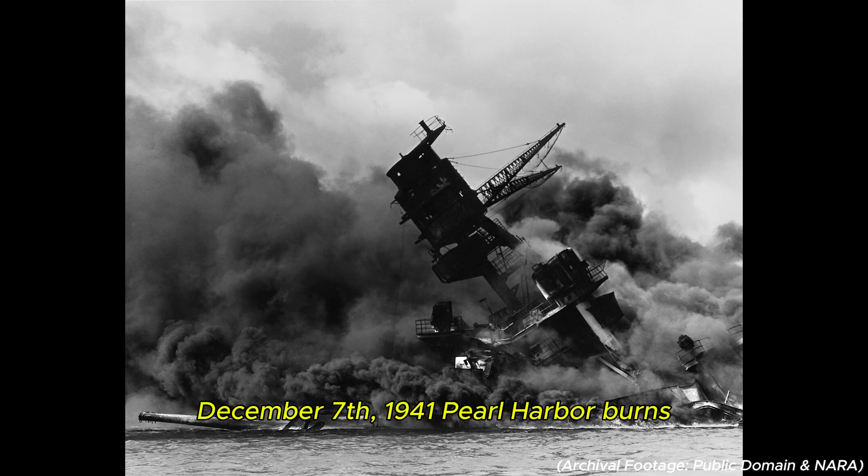December 7th, 1941. Pearl Harbor burns. The illusion of an ocean's worth of safety evaporates in a morning of fire and smoke. But as the last torpedoes find their mark and the battleships settle into the mud, a second silent catastrophe is already unfolding. Within 72 hours, the United States military faces a logistics nightmare.

It has nothing to do with battleships or aircraft carriers. It is a crisis more fundamental, a crisis of shelter. Across the Pacific theater, from the jungles of the Philippines to the desolate shores of Wake Island, American forces are sleeping in canvas tents, the standard issue shelter, and they are disintegrating. Under the relentless assault of tropical downpours, a canvas tent, expected to last for months, is rendered useless in less than 3 weeks.

In Washington, the War Department's morning briefings turn grim. The news from the front isn't about bullets, it's about water. Field reports arrive describing entire supply depots flooded, ammunition, carefully shipped 8,000 miles, ruined, radios, vital for communication, corroded into silence. Worse, they read reports of soldiers hospitalized with pneumonia because their shelter, their only refuge from the monsoons, literally fell apart while they slept.

The very environment is defeating the army before the enemy even gets a chance. This is the first brutal lesson of the Pacific War. You cannot fight a global conflict if you cannot keep your soldiers dry. The obvious solution is the traditional one, wooden barracks, build solid structures. But the Pacific is not Pennsylvania. Traditional wooden barracks require 2 things the military does not have: skilled carpenters and time. They require lumber, which simply does not exist on remote coral atolls. To ship wood is to sacrifice space that could be used for bullets or food.

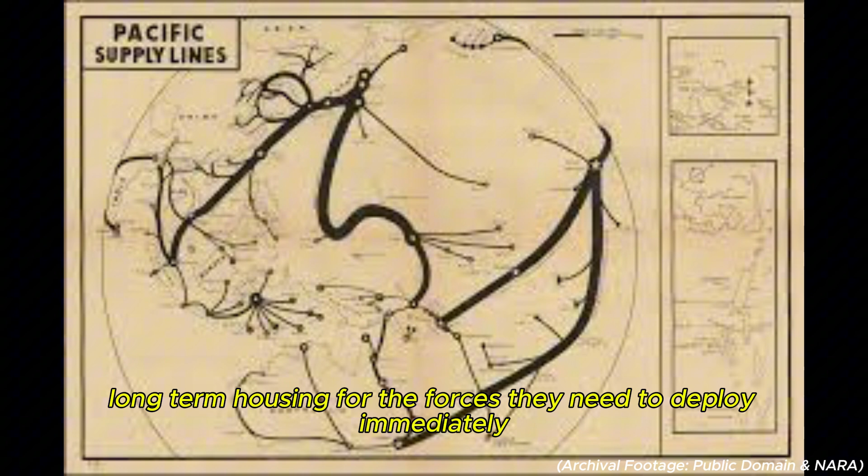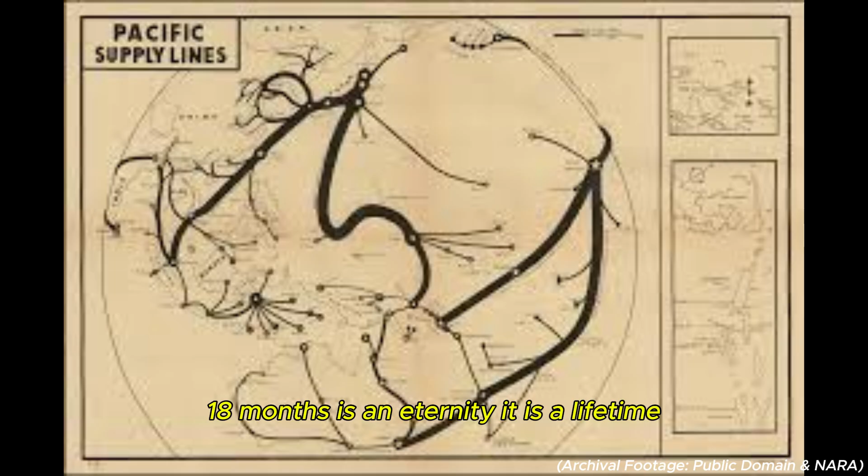The Navy's calculations are horrifying. To build conventional, long-term housing for the forces they need to deploy immediately, it would take 18 months. 18 months. In the chaos of early 1942, 18 months is an eternity. It is a lifetime. It is a guaranteed defeat. Before Brigadier General Eugene Reybold, the Army's chief of engineers, lies a problem not of strategy, but of physics. His engineers present him with what they call the impossible equation.

The equation is simple. The military needs shelter. They need it for 50,000 men yesterday, and they will eventually need it for a staggering 2 million personnel scattered across hundreds of islands, bases, and continents. The requirements sound like science fiction. The structure must be manufactured in a factory in Pennsylvania, then transported 10,000 miles through submarine-infested waters.

It must be lightweight, less than a Jeep, and the components must pack so efficiently they can fit onto a single railroad car. It must be assembled not by skilled carpenters, but by exhausted Marines, men who have perhaps never held a wrench, and they must be able to do it in a single day. Crucially, it must require no foundation, no concrete to pour, no complex site preparation. And then it must survive.

It must survive 130-degree equatorial heat. It must survive Category 5 typhoons. It must survive monsoons that dump 15 inches of rain in 6 hours. And it must survive the very real possibility of Japanese bombing runs. Oh, and it must cost less than $1,000, and they need 10,000 of them ready to ship in 6 months. The impossible equation. Every existing solution is thrown at it. Every single one fails. Let's look at the options on the table in 1942.

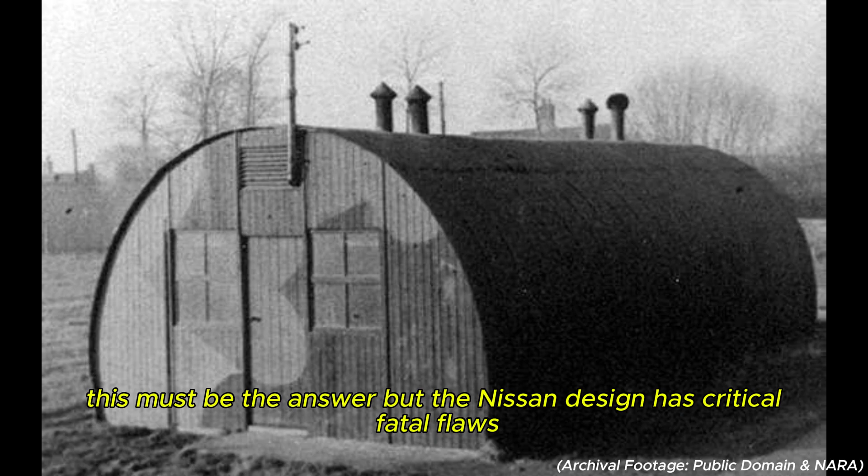But the Nissen design has critical, fatal flaws for a Pacific deployment. The Navy's engineers analyze the British blueprints and find 3 problems that doom the design. First, weight.

The British version is heavy. Its panels require specialized lifting equipment to position. This is fine in a prepared European base, but impossible on a hostile beachhead. It fails the assembly test.

Second, ventilation. The system is designed for the dry Libyan desert. In the 98-degree, 99% humidity of the Philippines, those same ventilation shafts turn the interior into a steel steam cooker, a sauna, unfit for human habitation.

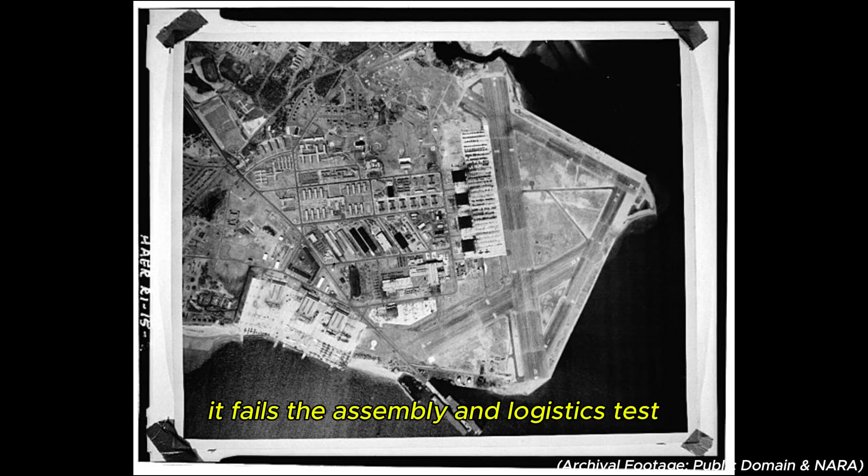And most damaging, the Nissen Hut still requires custom foundation work. It needs concrete pads or carefully built wooden platforms to sit on, which brings you right back to the carpenter problem. It fails the assembly and logistics test. It is a brilliant solution for the wrong war.

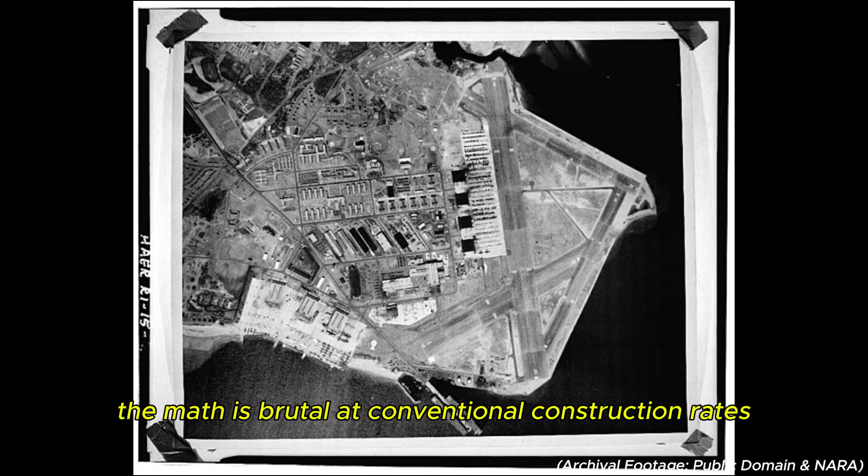The equation remains unsolved. The math is brutal. At conventional construction rates, the war would be over, lost, before half the troops even had roofs.

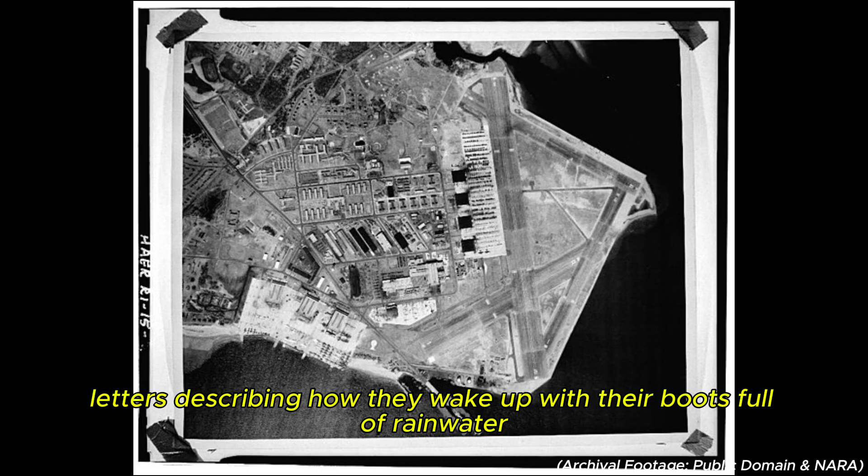Soldiers are already writing letters home, letters describing how they wake up with their boots full of rainwater, how fungus grows on their uniforms overnight, how their temporary tents collapse during storms, sending men scrambling in the mud at 3 a.m.

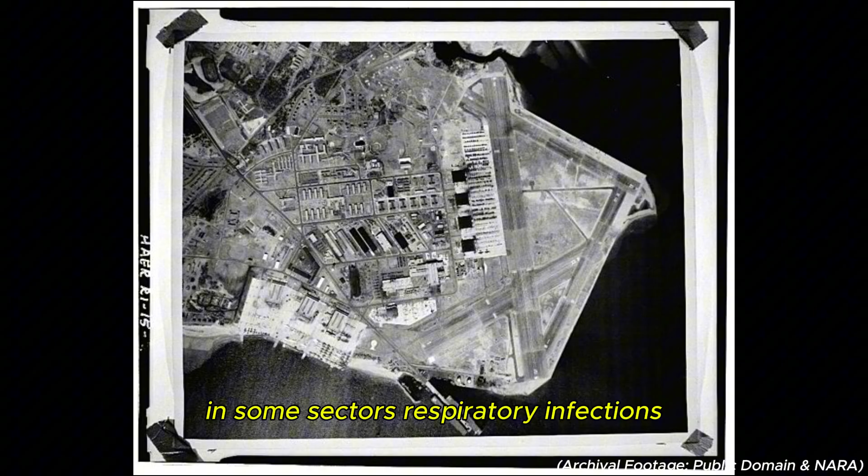The medical corps reports are even more terrifying. In some sectors, respiratory infections, pneumonia, bronchitis, are hospitalizing more men than enemy action. This isn't just about comfort, it's about maintaining a fighting force, a force that doesn't rot away from the inside before it even sees combat.

The call goes out. The specifications, that science fiction list, are sent to American engineering firms, to university research departments, and to the Navy's own fledgling construction battalions. The message is clear. Solve this. Solve it now. It's February 1942. The war is being lost.

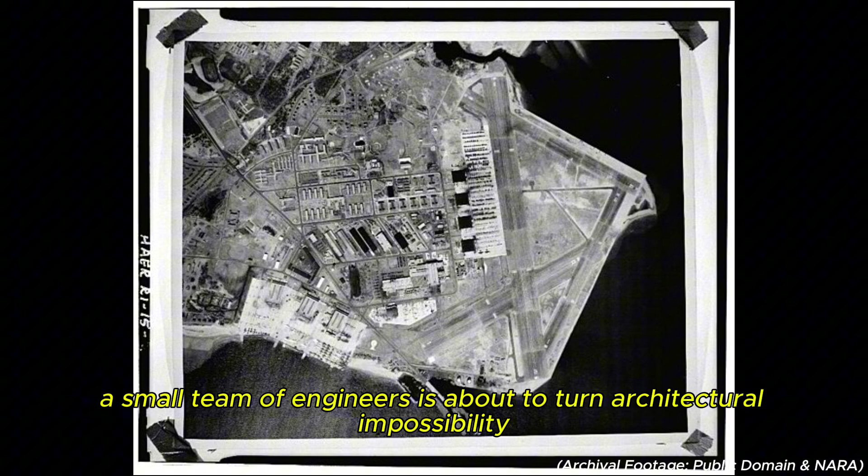The problem seems impossible. And somewhere, in a cold warehouse in Quonset Point, Rhode Island, a small team of engineers is about to turn architectural impossibility into reality.

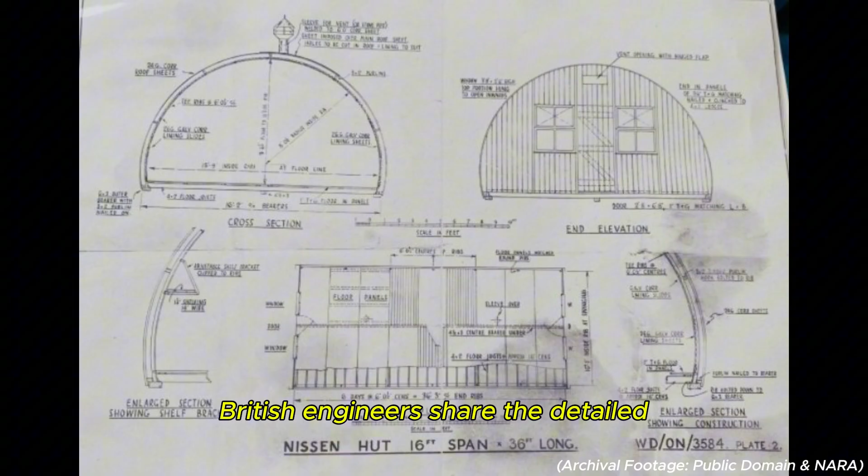February 1942. The crisis is set. The equation is written. In a peculiar twist of wartime cooperation, the first piece of the puzzle arrives at the Navy's Bureau of Yards and Docks. It comes from the British. Grateful for American supply shipments, British engineers share the detailed technical drawings for their best solution, the Nissen Hut.

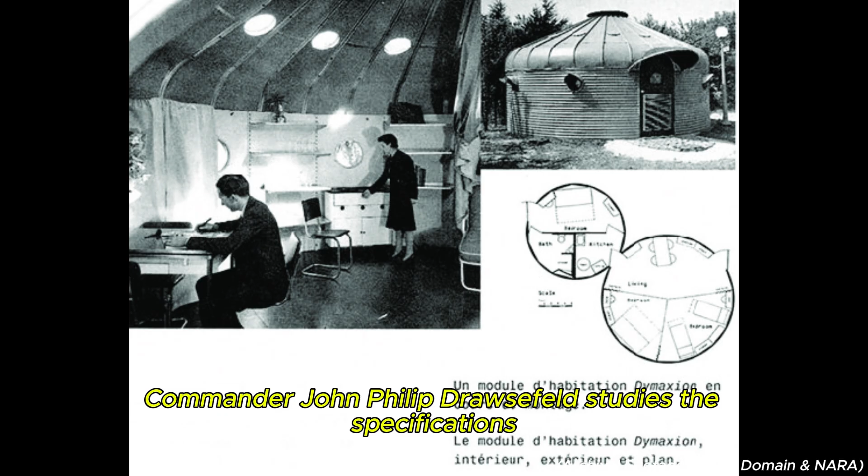On paper, it's the answer. 16-foot wide semicircular tunnels made from corrugated iron sheets bolted to a wooden frame. Commander John Philip Drawsefeld studies the specifications. He immediately sees both its genius and its catastrophic problems.

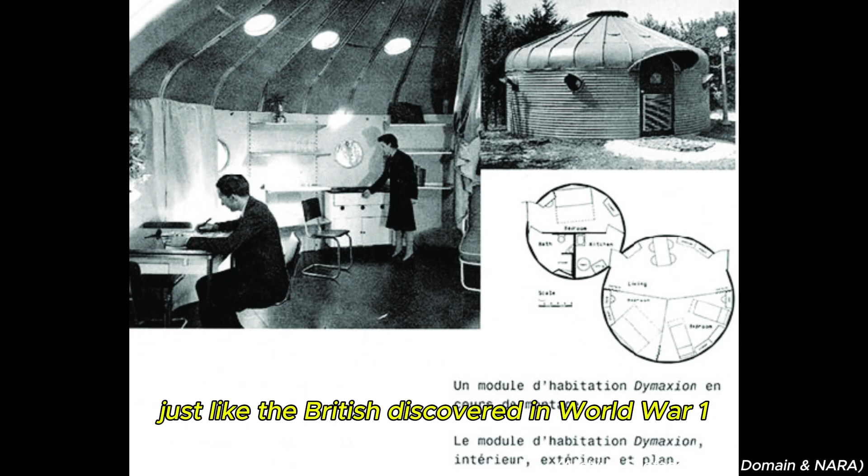The genius, the arch shape. Just like the British discovered in World War I, the arch naturally deflects wind and sheds water without complex engineering. It's strong and simple. But then Drawsefeld's red ink comes out. The problems. A laundry list that would doom the design in the Pacific.

First, the British huts weigh 3 tons when disassembled. They require foundation bolts drilled into concrete. This fails the no foundation and lightweight test.

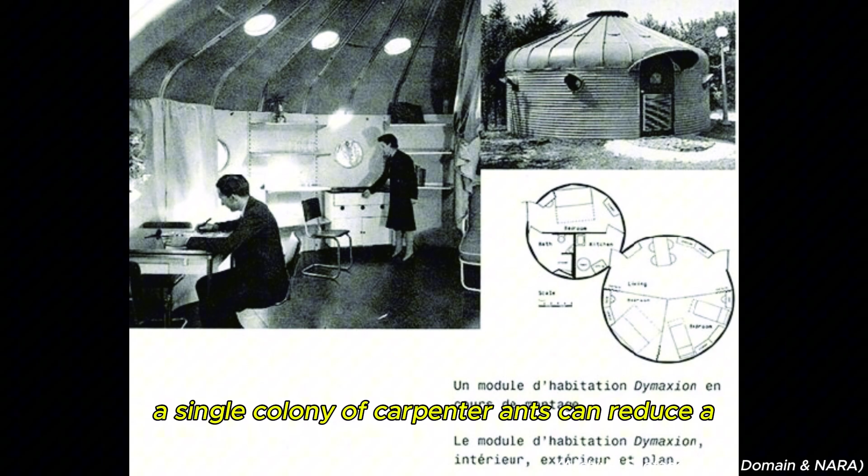Second, the frame. The iron sheets are bolted to an internal wooden frame. Drawsefeld knows what happens to wood in the tropics. It becomes a feast for termites. A single colony of carpenter ants can reduce a support beam to a hollow shell in 1 season.

He circles the ventilation specs. 2 small windows, designed for the cool, damp weather of Scotland, would turn these steel tunnels into ovens at Guadalcanal's 98-degree average temperature. It was a pressure cooker, not a shelter. The Nissen Hut wasn't the solution. It was just a better articulation of the problem.

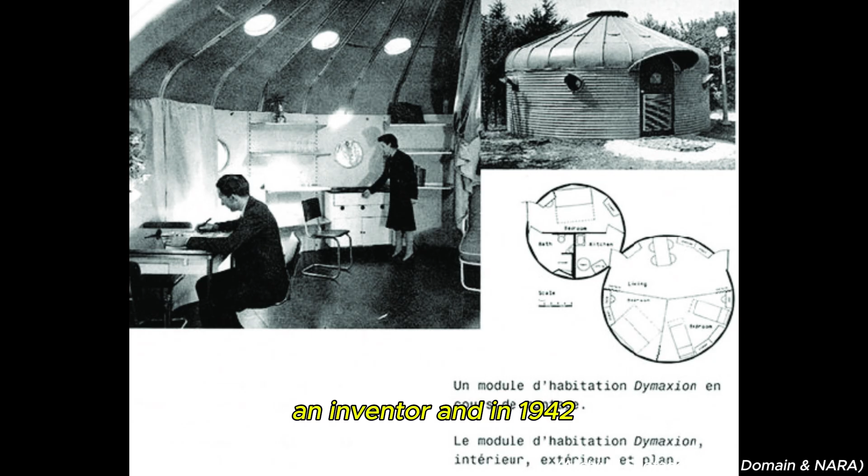But there is another American voice in this conversation, an influence that comes from an unexpected corner. He is an architect, a philosopher, an inventor. And in 1942, most of the world dismisses him as a crank. His name is Buckminster Fuller.

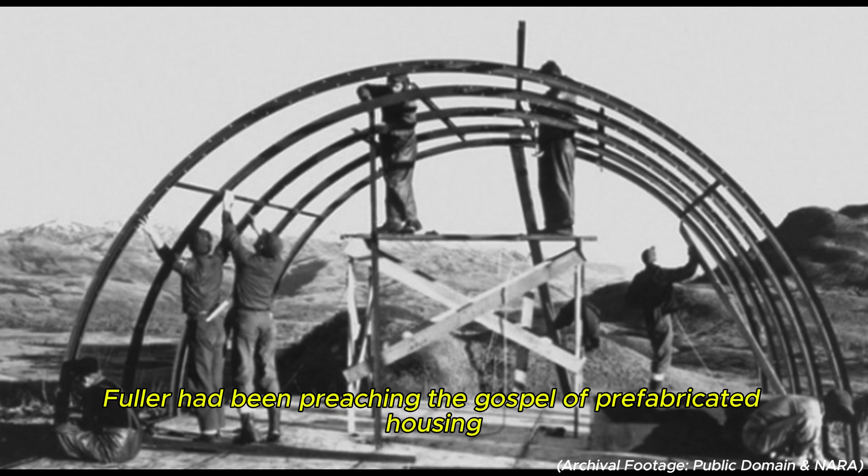Since the 1920s, Fuller had been preaching the gospel of prefabricated housing. His Dymaxion house concept, factory-built, lightweight, assembled on site, made of industrial materials, it reads like prophecy. In 1942, Fuller's ideas about mass-producing housing like automobiles, using steel and aluminum instead of traditional lumber, designing for rapid deployment, suddenly, these ideas sound less crazy.

The military hasn't directly consulted Fuller. They don't need to. His published papers are circulating through every engineering department in the country. And his core insight proves invaluable: treat buildings like manufactured products, not construction projects.

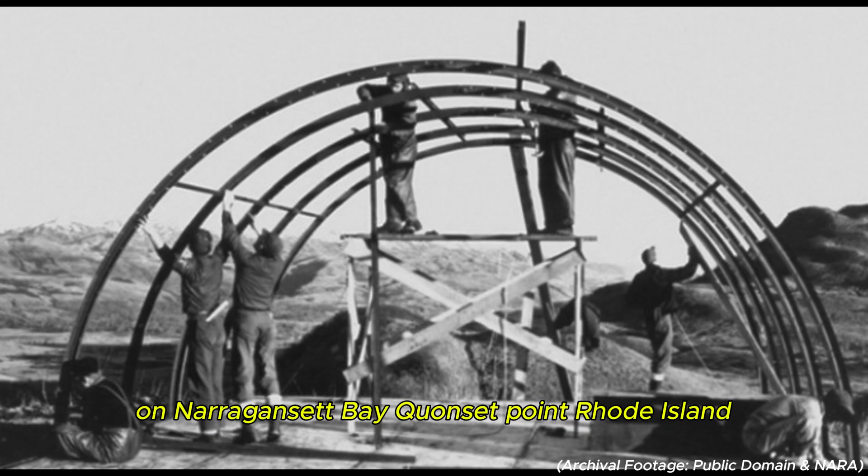The Navy consolidates this new thinking at a freshly commissioned air station on Narragansett Bay, Quonset Point, Rhode Island. The location isn't random. Rhode Island has deep manufacturing expertise in sheet metal, born from its jewelry and silverware industries. It has proximity to the steel mills of Pennsylvania and to shipyards that understand intimately what marine-grade corrosion resistance really means.

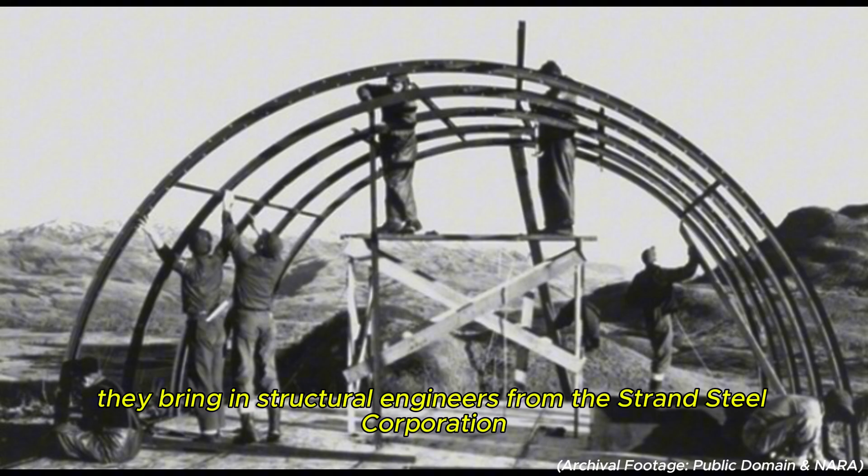In March 1942, the Navy assembles an unusual team. It's not just Navy brass. They bring in structural engineers from the Strand Steel Corporation, men who had spent their lives building prefabricated farm buildings. They bring in architects from the George A. Fuller Construction Company, men who specialize in rapid assembly methods. And crucially, they add Navy officers who have actually served in the Pacific, men who know what typhoon-proof really means versus what it means on paper.

The team lead, Otto Brandenberger, brings that farm building experience from Strand Steel. And it turns out, building a barn for the Midwest is exactly the right experience for this problem. His Strand Steel barns used a simple, elegant trick, self-supporting arched panels. This was Brandenberger's radical proposal.

Look at the Nissen Hut. It's a wooden skeleton with a steel skin draped over it. Brandenberger proposed they eliminate the wooden skeleton entirely. No wood for termites to eat, no complex joinery to fail during storms. He proposed they make the corrugated steel skin itself carry all the loads.

This violates conventional architectural wisdom in 1942. In 1942, steel is for bridges and skyscrapers held together by massive internal frames. It is not supposed to be the building. But Brandenberger knows something they don't. He knows his simple farm barns have survived Midwest tornadoes without any internal framing, and he is willing to bet the same principle can be scaled up for war.

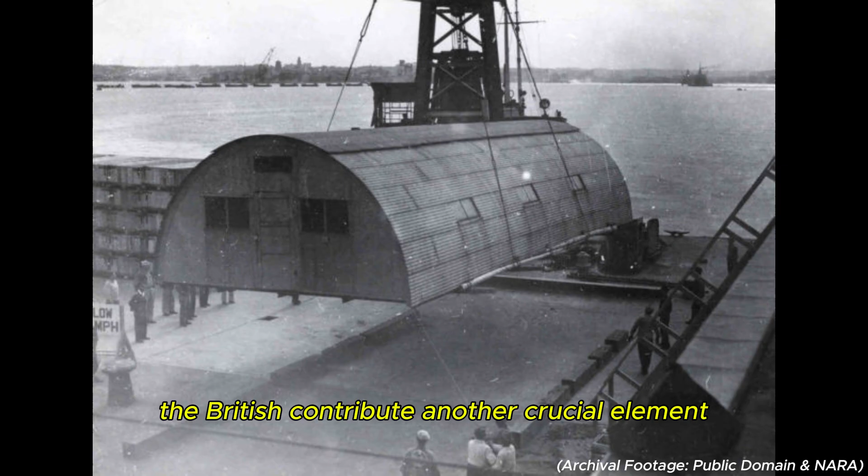The British contribute another crucial element through their painful experience. Their Nissen huts in Burma and Singapore have taught them exactly how tropical environments destroy buildings. The reports read like horror stories. Fungus isn't just cosmetic, it literally eats through wood preservatives. Humidity doesn't just make things damp, it corrodes metal fasteners until roofs collapse. Carpenter ants aren't just annoying, they reduce support beams to dust.

But these horror stories provide the Quonset team with a checklist of everything that must be engineered out of the design from day one. No wood in contact with the ground. All steel must be hot-dip galvanized, not just painted. Ventilation must be aggressive enough to prevent condensation. Every fastener must be accessible for replacement without disassembling the structure.

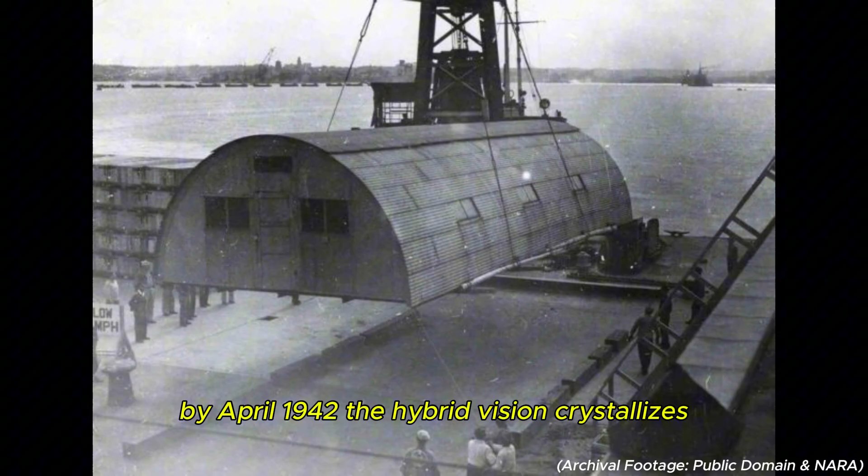By April 1942, the hybrid vision crystallizes. Take the Nissen hut's brilliant arch geometry, strip out everything that makes it heavy, vulnerable, or slow. Add Buckminster Fuller's mass production philosophy. Add Brandenberger's frameless steel barn design. And then engineer every last detail for the specific, unrelenting hell of Pacific Island warfare.

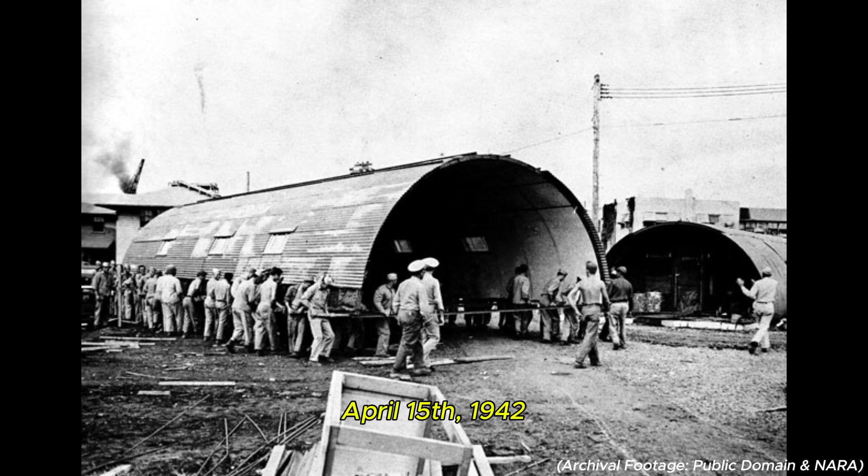April 15, 1942. Otto Brandenberger walks into a Quonset Point warehouse with 30 engineers and a deadline. A deadline that would be laughable if the war situation weren't so desperate. 60 days to design, prototype, test, and approve a completely new building system that does not yet exist.

The team works in shifts around the clock. They sleep on cots pushed against the warehouse walls. They subsist on Navy mess hall coffee and the kind of intense, suffocating pressure that either produces brilliance or complete collapse. Brandenberger divides his crew. One team tackles aerodynamics. Another figures out how to nest components for shipping. A third works exclusively on the joint and fastener problem that plagued the British design.

The first radical decision happens on day 3. Traditional architectural drawings take weeks to produce. The team doesn't have weeks, so they don't draw the building. They build it in real time. They sketch a detail in the morning, have the metalworking shop fabricate it by afternoon, test it to failure overnight, and revise the design by dawn.

This iterative prototyping approach is standard practice in Silicon Valley today. In 1942, it is revolutionary. The warehouse floor becomes a laboratory, scattered with failed joints, bent test panels, and increasingly refined versions of each component. They steal a technique from aircraft manufacturing. Every part gets a number, every revision gets documented, and nothing moves to the next prototype generation without solving the previous version's failure points. The revolutionary process of real-time prototyping wasn't just chaos. It was a pressure cooker forcing rapid evolution.

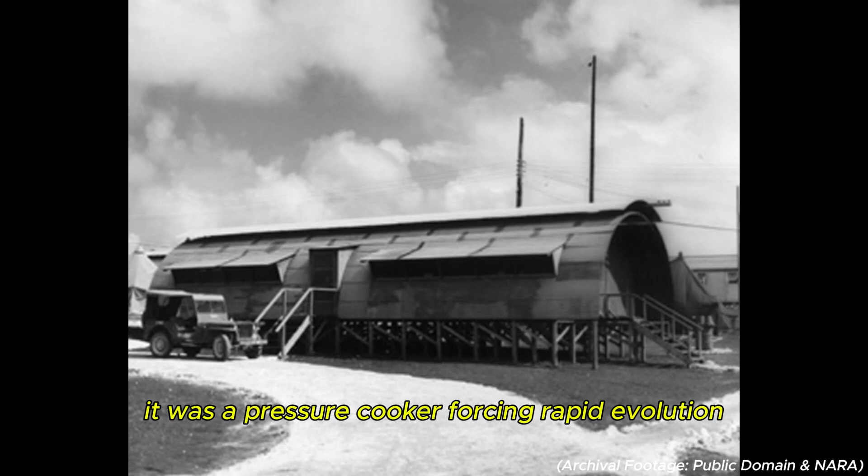The first problems to be solved weren't elegant engineering, but brutal practicality. The dimensions, for instance, were not born from aesthetic choice. They were dictated by the American railroad system. The final hut had to be 16 feet wide. Why? Because that was the absolute maximum that could fit on a standard rail car without requiring special permits.

The sections were 20 feet long. Why? Because that was short enough for a four-man crew to lift a panel, but long enough to create usable space. The standard final length, 48 feet. Capacity, 36 men with bunks. The Quonset team discovered this size hit a perfect sweet spot in structural engineering. Make it smaller and you waste precious shipping capacity. Make it larger and the panels become too heavy for field assembly, or the arch starts requiring internal supports, reintroducing all the problems they were trying to eliminate.

But the single most critical calculation, the one that consumed 2 full weeks of their priceless 60-day deadline, was the arch radius. Too flat, and the wind forces in a typhoon could peel the structure open like a sardine can. Too steep, and you waste interior headroom and create impossibly complex geometry for the end walls. After hundreds of calculations, Brandenberger's team settled on an 8-foot radius, a perfect semicircle. This was the masterstroke. This shape provided 7 feet of headroom at the sides, and it created what structural engineers call a self-bracing arch. The corrugated steel naturally wants to hold this curve.

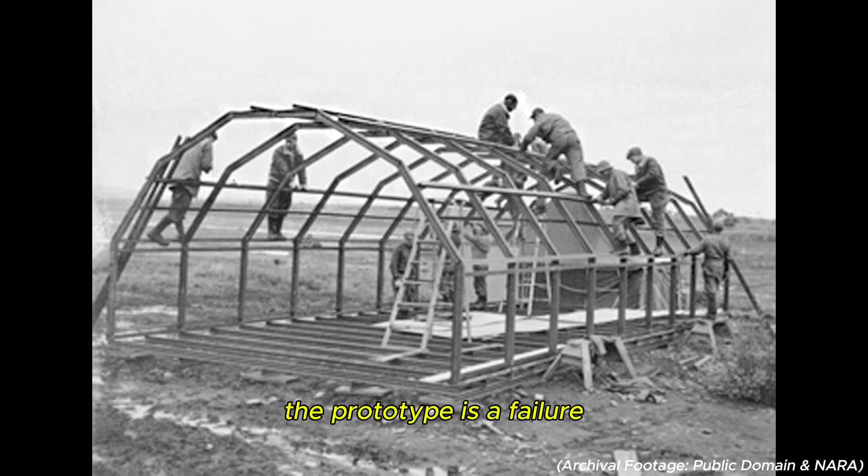The team identifies the bottleneck immediately. It's not the walls, it's not the roof, it's the floor system. They had been trying to include a wooden floor as part of the package, assuming soldiers needed to be off the ground. But this wooden floor was complex, slow to assemble, and, as the British reports had warned, the very first thing to rot in tropical conditions.

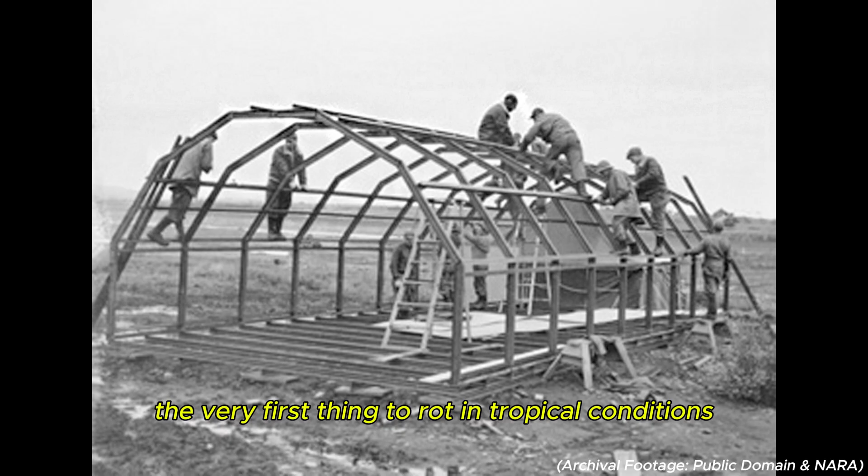The solution is elegant in its brutal simplicity: eliminate the floor entirely from the basic design. The hut will sit directly on whatever surface exists, coral, sand, dirt, or gravel. If a unit required a finished floor for a medical station, that could be added later as a separate project. But the basic shelter achieves weather protection without it.

This single decision cuts assembly time from 14 hours to a blistering 8 hours. It shaves 1,200 pounds off the shipping weight. It solves the problem. On June 10, 1942, exactly 58 days after starting, the final prototype stands complete: 96 corrugated steel panels, each weighing less than 50 pounds, bolted together to create 720 square feet of enclosed space. Total materials cost: $1,394. Total weight: 9,000 pounds.

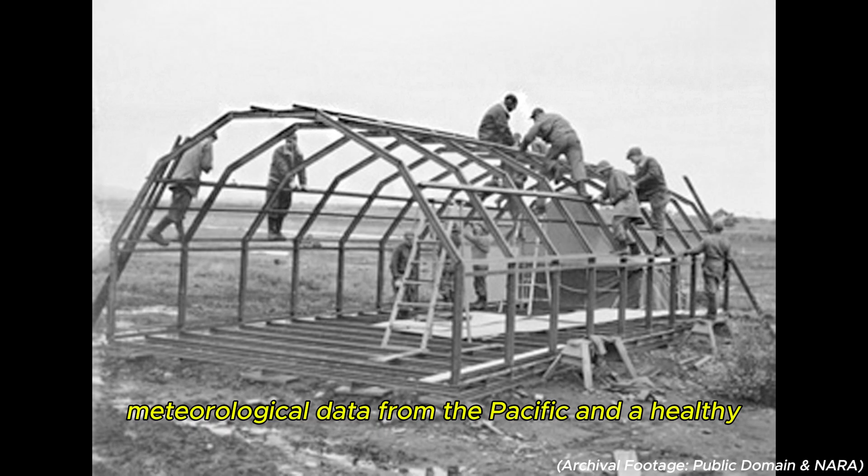The 60-day miracle is complete. The engineers have solved the impossible equation, but the celebration is short-lived because the real test begins, the engineering equivalent of an interrogation. Navy structural engineers arrive from Washington. They carry wind load tables, meteorological data from the Pacific, and a healthy, profound skepticism that this corrugated steel tunnel can survive what nature actually throws at tropical islands.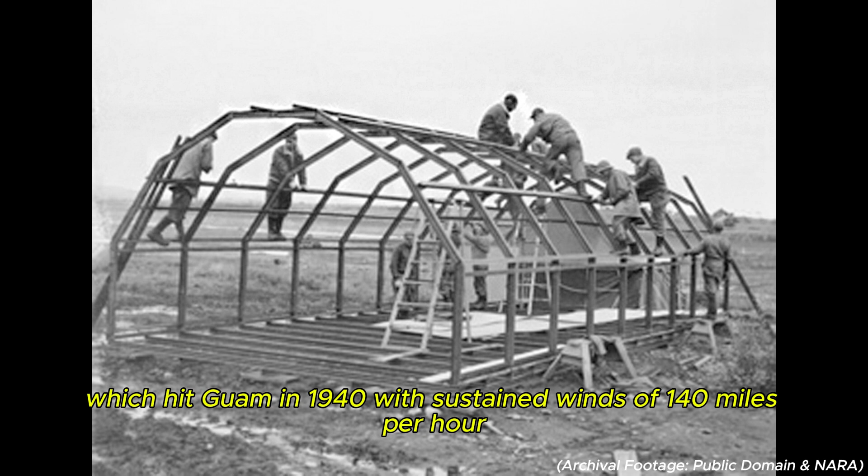The numbers they're working with aren't theoretical. They are pulled from actual terrifying weather events: Typhoon Gloria, which hit Guam in 1940 with sustained winds of 140 miles per hour, and the 1935 Labor Day hurricane, which drove wooden planks through palm trees like spears. If a Quonset hut fails in a storm, the result isn't just property damage, it's dead servicemen.

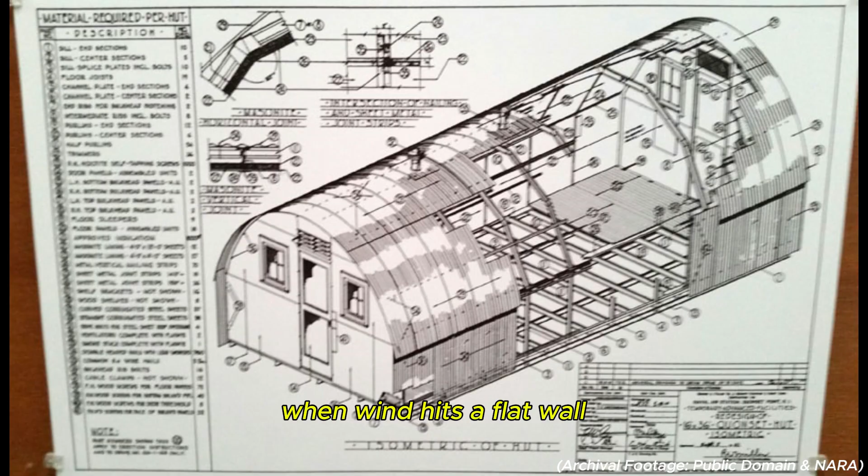Brandenburger's team starts with the fundamental physics. First, aerodynamics. When wind hits a flat wall, it pushes with maximum force, but a curved surface deflects the wind, splitting the force, sliding it up and around. Think of how water flows around a smooth river stone versus slamming into a dam wall. The profile means hurricane force winds slide over the structure rather than trying to punch through it.

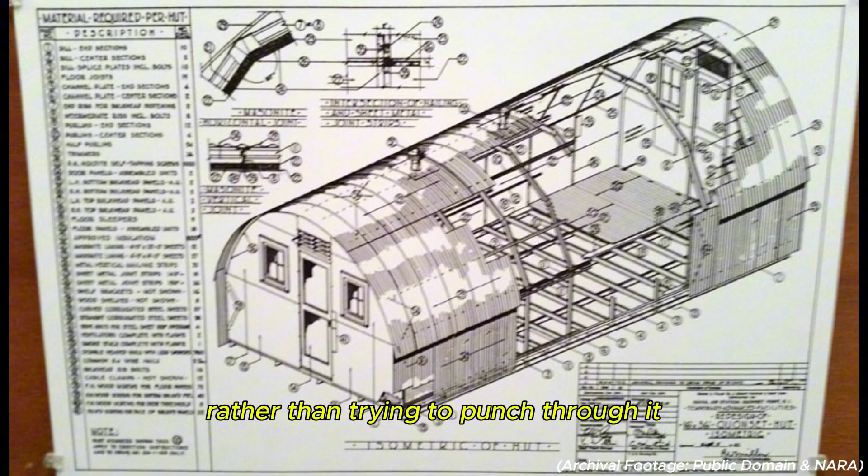Second, the corrugations. Those ridges add a second layer of brilliance. They create structural rigidity, the same way folding a piece of paper makes it strong enough to support weight. Each corrugation acts like a tiny I-beam, resisting bending forces.

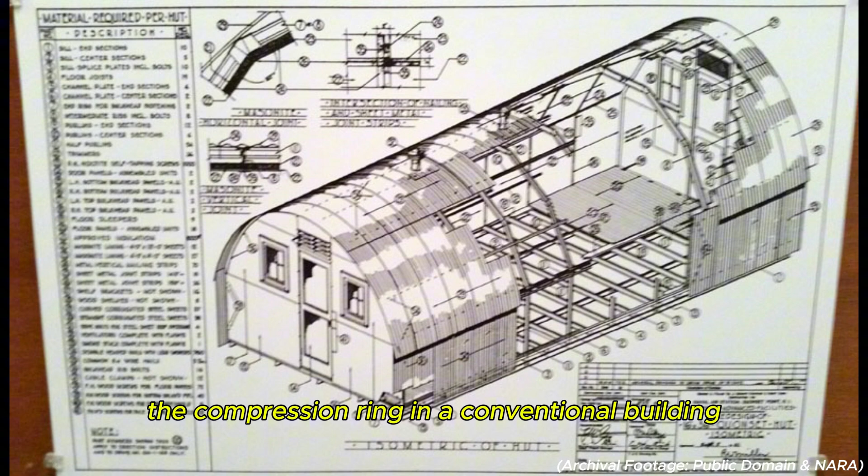And finally, the most important principle: the compression ring. In a conventional building, the roof pushes down on the walls, and storm winds can literally lift the roof off. The Quonset arch is a single, continuous curve, and every panel shares the load with its neighbors. It's the same principle that keeps ancient Roman stone bridges standing for centuries. The structure works with physics, not against it.

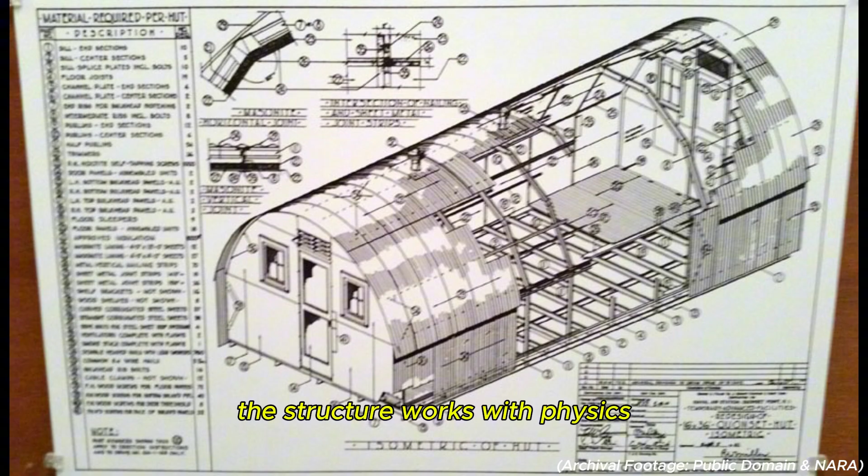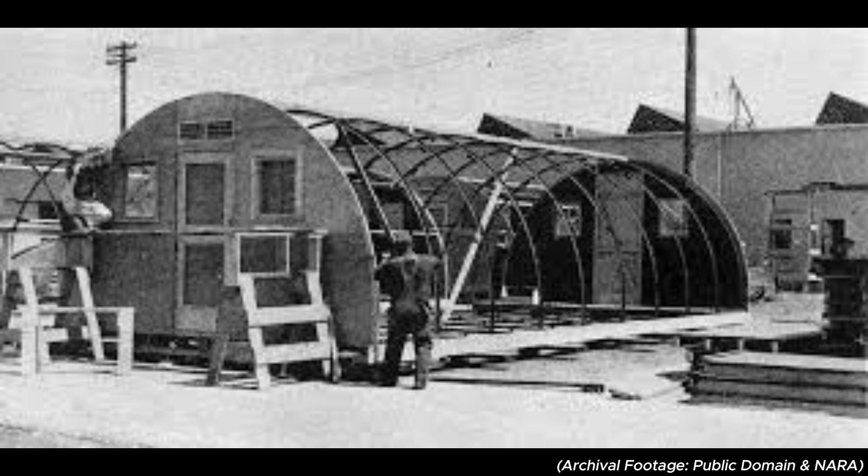Perfect. The instruments record the structure flexing by less than 2 inches at its crown, then returning to its original shape when the wind subsides. The joints hold. Nothing leaks. The structure behaves exactly as the calculations predicted.

But the tropical environment test proves more challenging. You cannot simulate years of jungle rot in a Rhode Island warehouse. So the Navy ships a test unit to the Panama Canal Zone. Humidity, 85% year-round. Temperature, always above 80. 6 months later, the report comes back. The news is good: minimal corrosion on the galvanized panels, no structural degradation.

But there is one serious, unexpected problem: interior condensation. When the hot, humid daytime air hits the relatively cooler steel at night, water literally rains from the ceiling inside the hut. The design is too weatherproof.

The solution? Add ventilation louvers at both ends and along the ridgeline, openings to let hot air escape and create airflow. These vents add $47 to the unit cost, but they transform the hut from a steel sauna into something humans can actually occupy. The iterative design process works.

The final engineering challenge is the foundation. How do you anchor it without concrete? The answer comes from tent technology, scaled up: massive steel stakes, driven into the ground, connected to the hut's base with adjustable tension cables. The system is brutally simple.

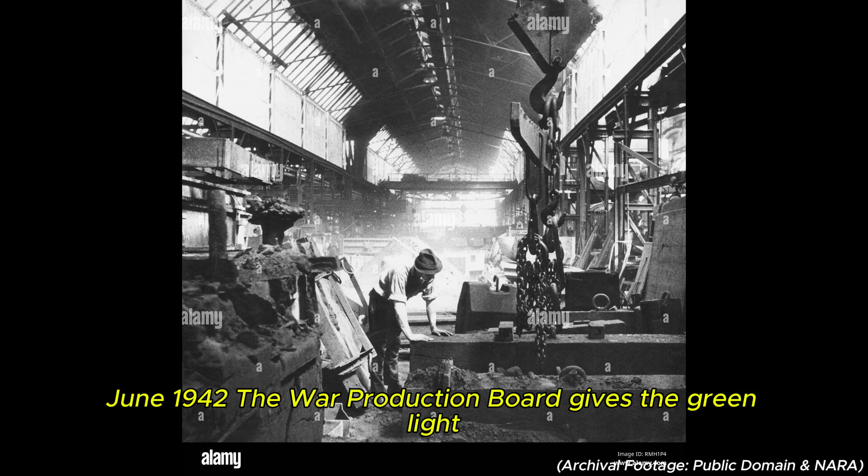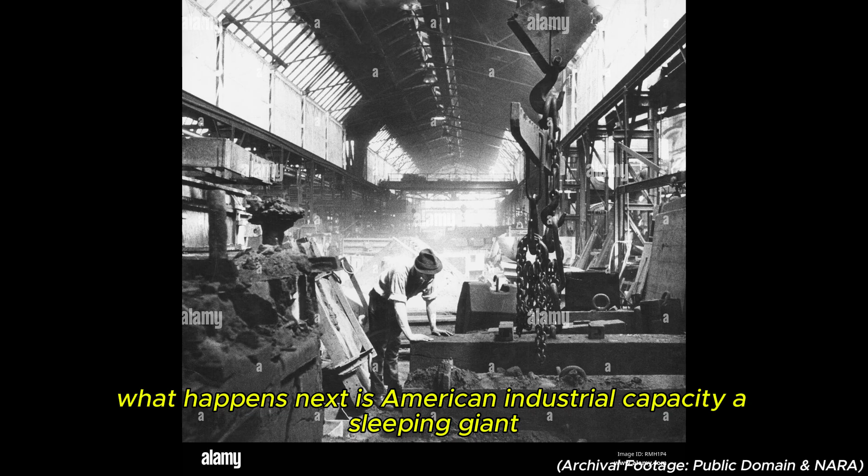June 1942. The War Production Board approves the Quonset Hut for mass manufacturing. The 60-day miracle is over, the interrogation is complete, the design is locked, and the real war effort begins. What happens next is American industrial capacity, a sleeping giant awakened by Pearl Harbor, operating at its absolute terrifying peak.

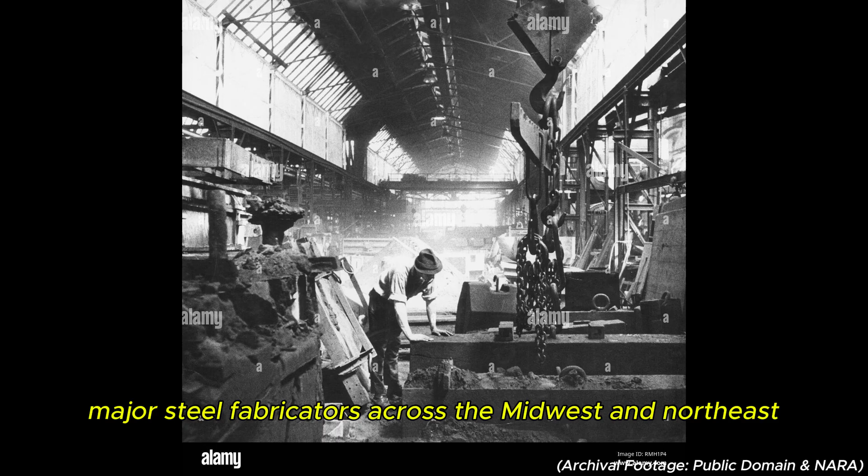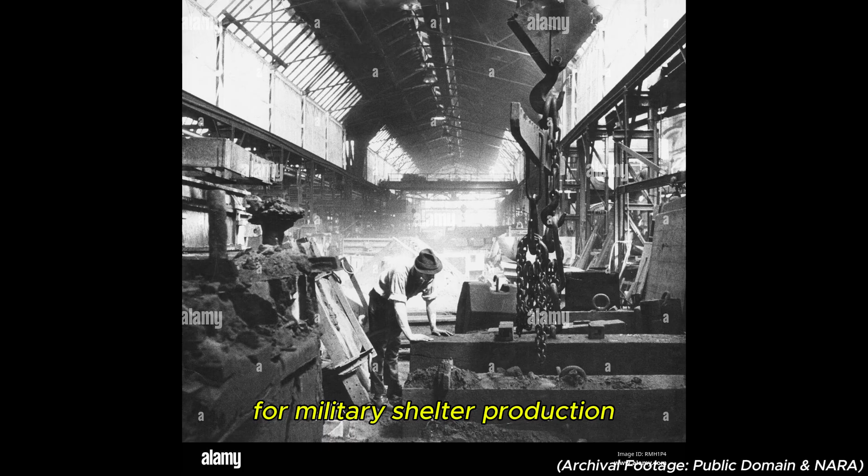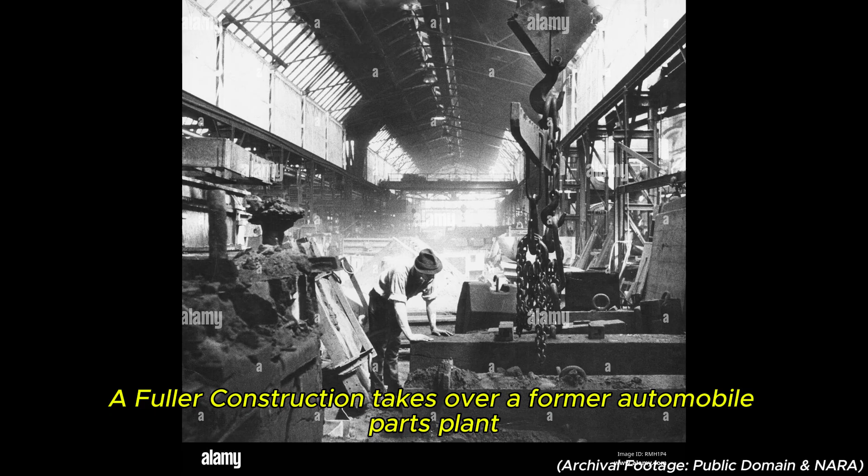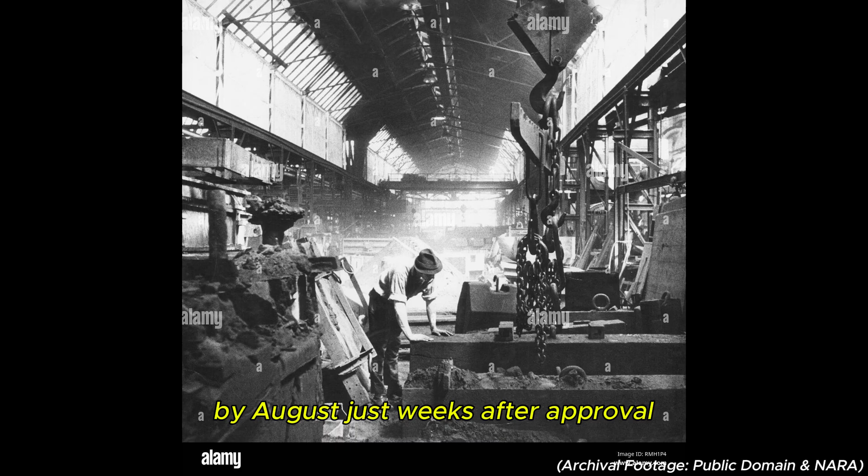The Navy doesn't just contract with one company. It contracts with 10 major steel fabricators across the Midwest and Northeast. Companies that were making grain silos and water tanks 6 months ago are now retooling their entire existence for military shelter production. The Stran-Steel Corporation converts its entire Philadelphia facility. George A. Fuller Construction takes over a former automobile parts plant in Chicago. Great Lakes Steel dedicates 2 entire rolling mills to nothing but corrugated panel production. By August, just weeks after approval, these factories are collectively producing 1,500 complete huts per week, and the number keeps climbing.

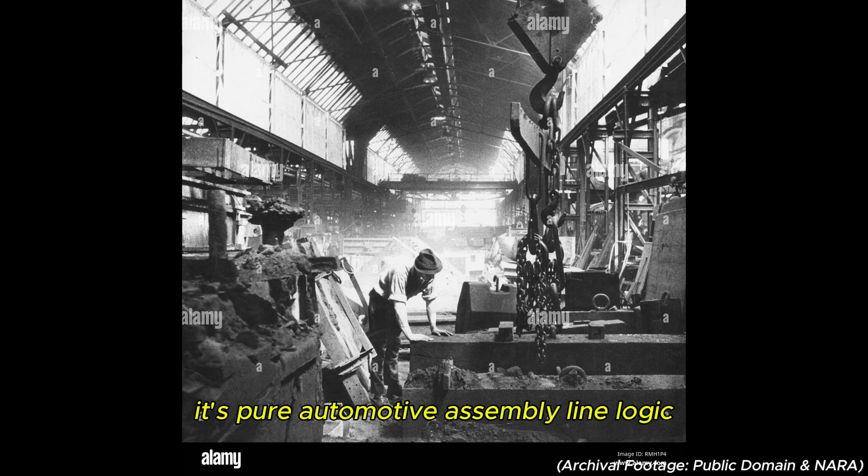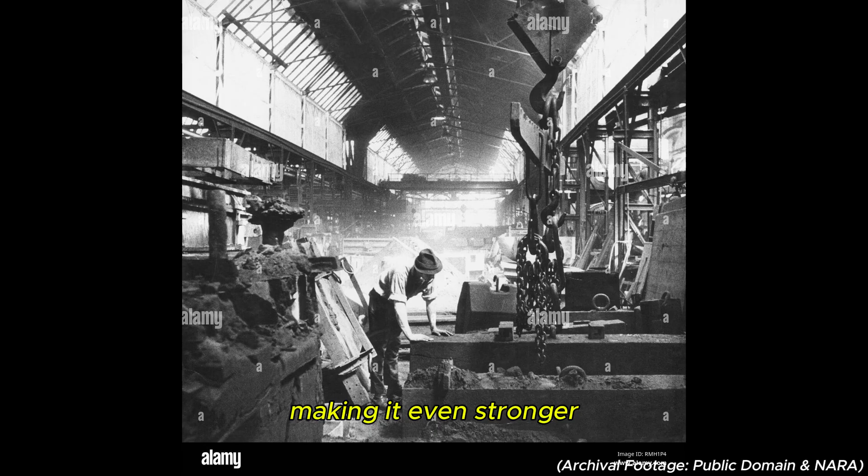The manufacturing process is not construction, it's pure automotive assembly line logic. Massive steel coils arrive by rail. Rolling machines corrugate the flat steel, a process that work hardens it, making it even stronger. But the most crucial step is not the shaping, it's the protection. It's a process that would define the Quonset Hut's future.

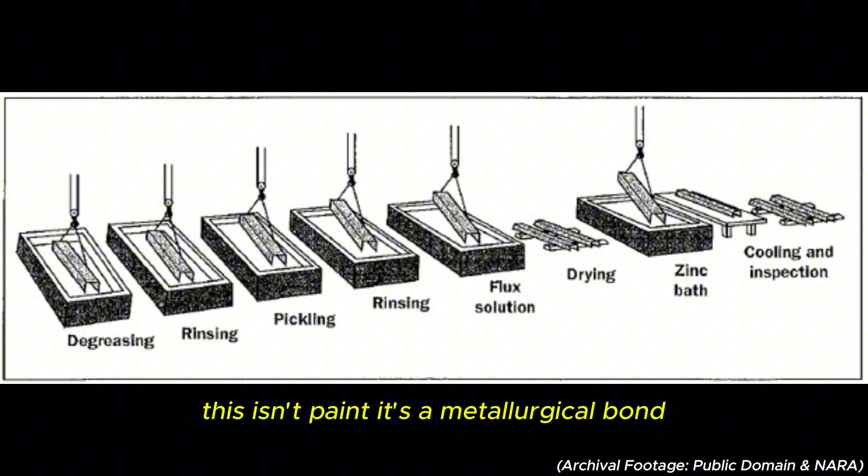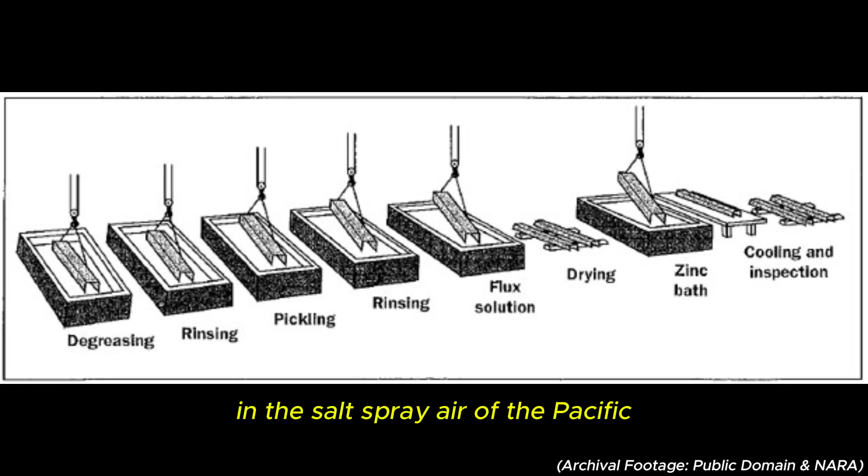Hot dip galvanizing. The panels are dipped in molten zinc at 850 degrees Fahrenheit. This isn't paint, it's a metallurgical bond. The zinc coating chemically sacrifices itself to corrosion before the underlying steel can rust. In the salt spray air of the Pacific, this single step, this $112 extra cost, means the difference between a 5-year lifespan and a 50-year lifespan. It was proven non-negotiable.

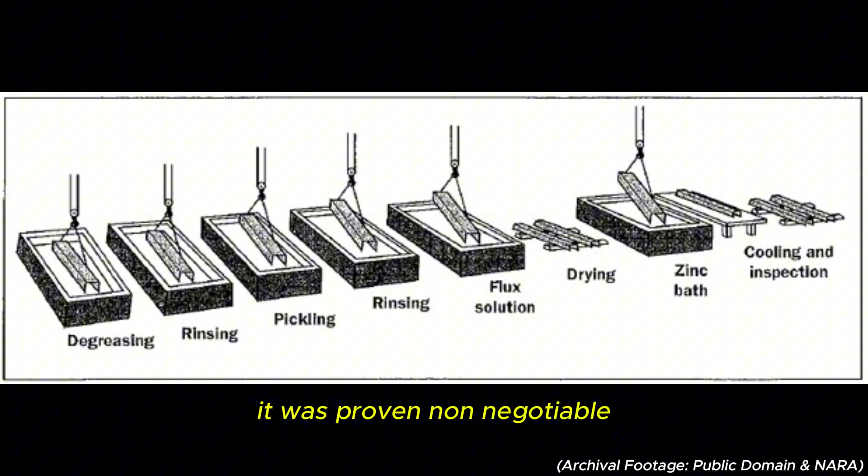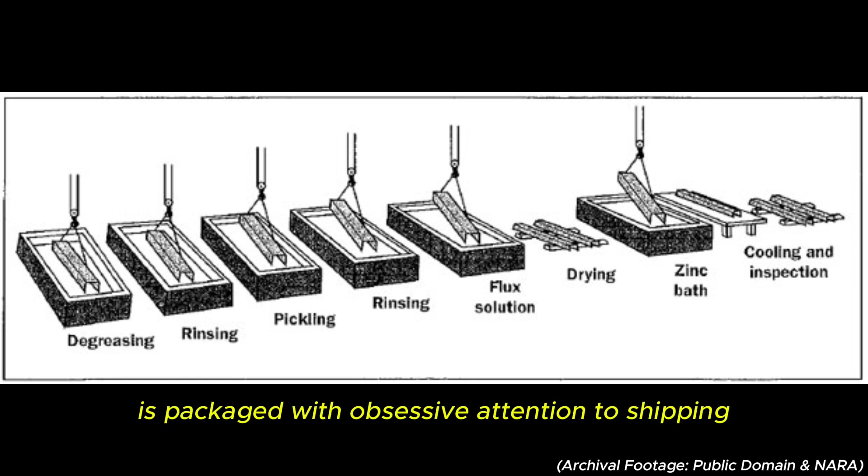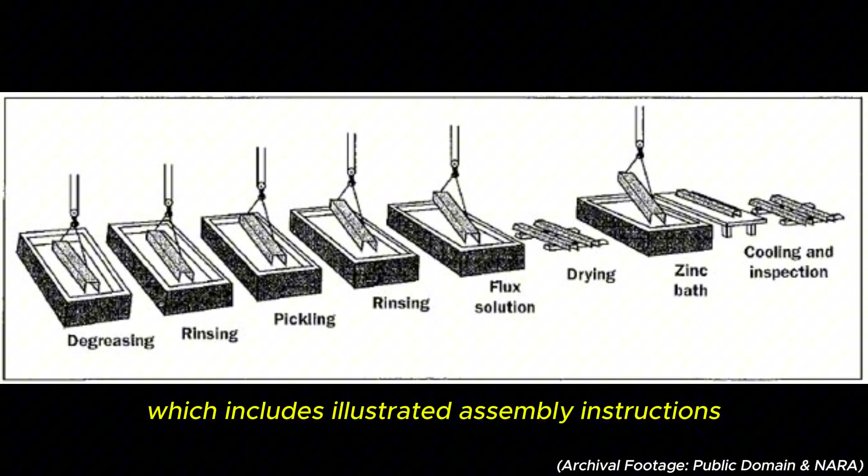And then, the logistical masterpiece. Each complete hut kit, every panel, every end wall, every single nut and bolt, is packaged with obsessive attention to shipping. The plywood end walls are packed flat. All hardware is boxed in a single crate, which includes illustrated assembly instructions, designed for men who might not even read English. But the true genius was in the steel.

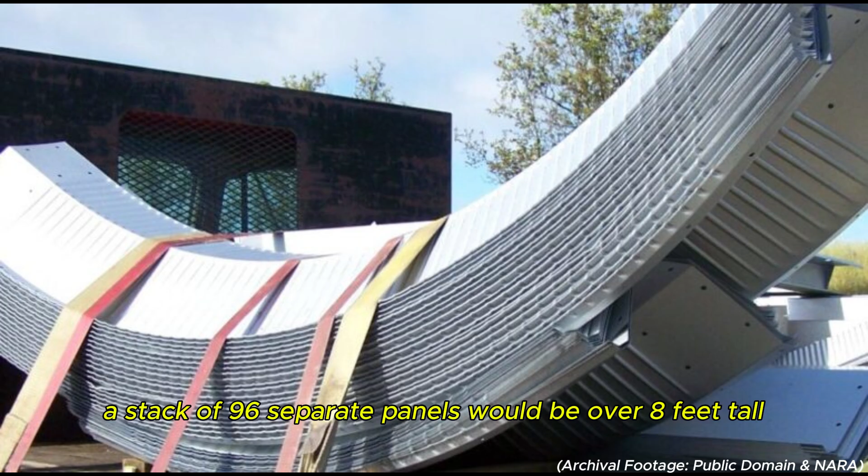The 96 corrugated panels nest inside each other like stacked bowls. A stack of 96 separate panels would be over 8 feet tall. A nested stack of 96 Quonset panels is just 14 inches tall. This packaging density is a strategic weapon. The entire hut loads onto one standard 40-foot flatbed railcar. There is zero wasted space.

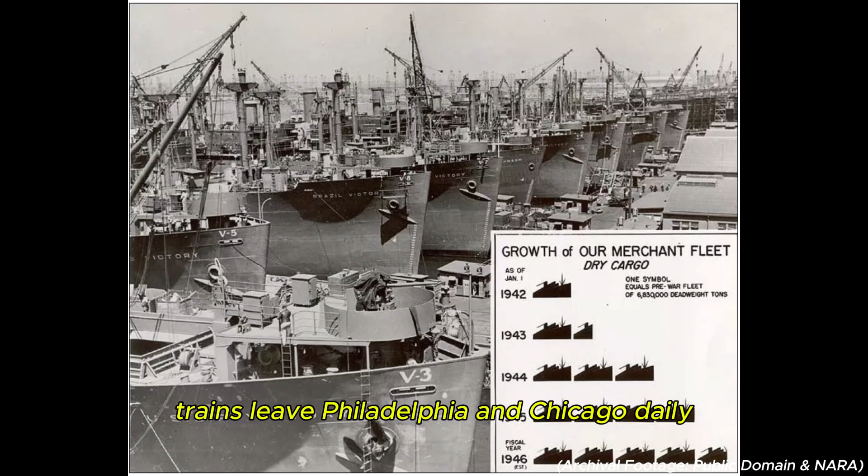The shipping choreography is wild. Trains leave Philadelphia and Chicago daily, racing to ports in San Francisco and Seattle. A single Liberty ship can carry 200 Quonset huts, that is shelter for 7,200 men. The War Shipping Administration tracks every manifest. These aren't just buildings, they are strategic assets, as vital as tanks or ammunition.

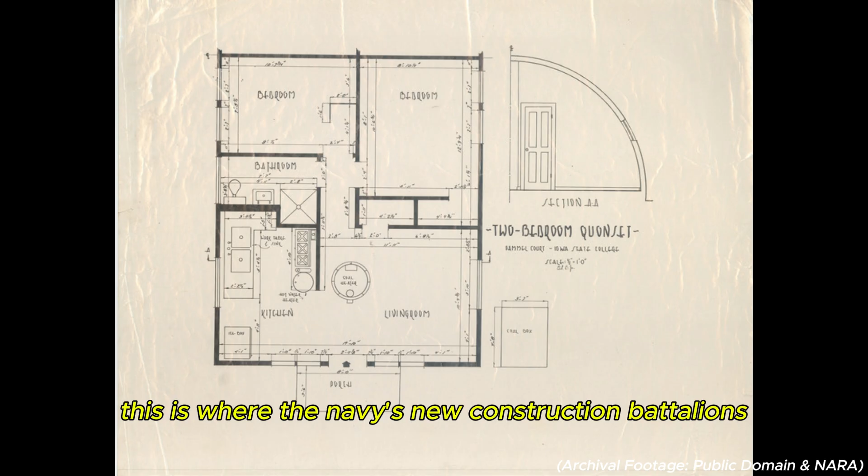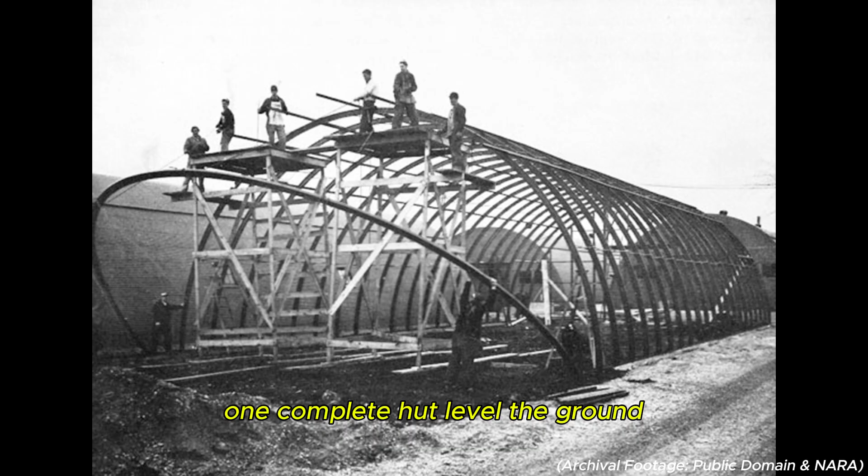But the design's true genius only shines on the receiving end. This is where the Navy's new construction battalions, the famous Seabees, turn engineering into reality. They develop standardized procedures that turn shelter erection into a choreographed operation: 6-man crew, 8 hours, 1 complete hut. Level the ground, 2 men handle the end walls while 4 wrestle the 50-pound steel panels. They overlap by 6 inches, they bolt together. No welding, no concrete, no skilled carpentry, just wrenches, a level, and illustrated instructions.

The speed record is set on Espiritu Santo in 1943, when a specially trained crew erects a complete hut in 4 hours and 17 minutes. But that's just showboating. The real achievement is sustained production, crews throwing up 5 or 6 huts per day after day, building entire bases faster than the Japanese can bomb them back to rubble. By December 1943, monthly production hits 8,000 units.

The cost accounting tells the victory story. 1 conventional barracks: $12,000, 400 man-hours of skilled labor, 6 weeks of construction time. 1 Quonset hut: $1,394, 60 man-hours of unskilled labor, 8 hours of construction time. The Quonset delivers shelter at 1/10 the cost in 1/20th the time. By mid-1944, over 160,000 units are deployed, housing for nearly 6 million personnel, built in less than 2 years.

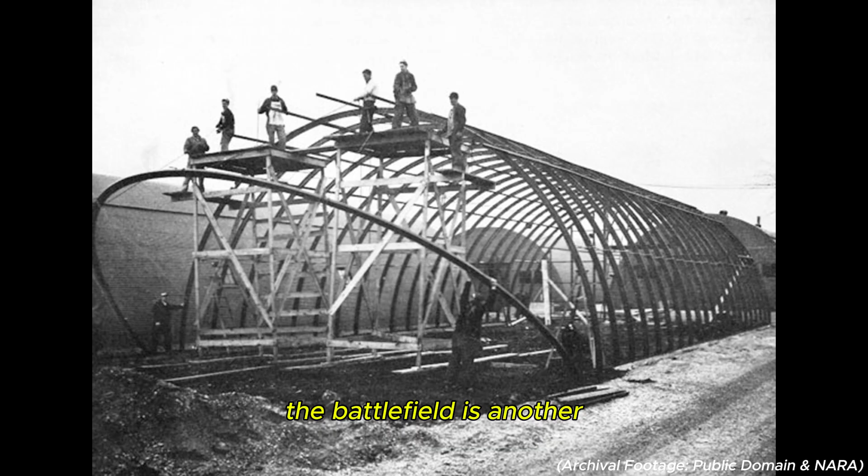The impossible equation was solved in the lab. But the lab tests at Quonset Point were one thing, the battlefield is another. Trial by fire: Guadalcanal, August 1942. The first combat-deployed huts arrive on a beach where the temperature is 95 degrees with 90% humidity, and Japanese bombers make daily visits.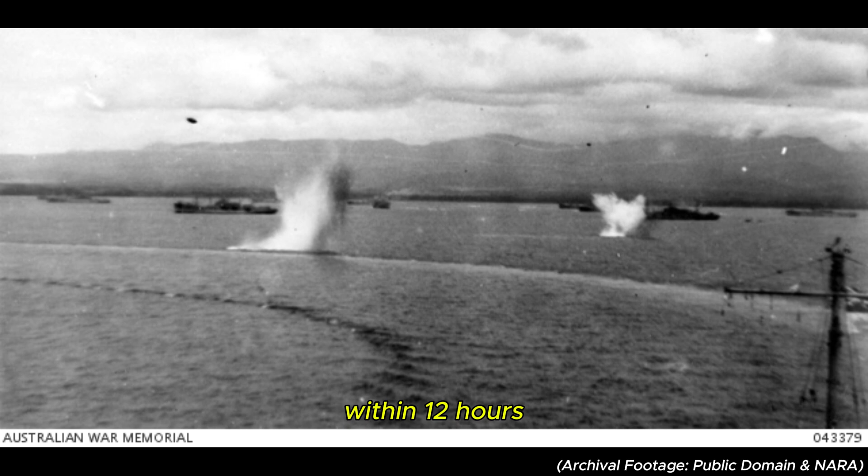Marine engineers unload the flat-packed panels under sporadic artillery fire. Within 12 hours, Henderson Field has 10 new structures housing maintenance crews. The real test comes 3 days later. A Japanese bombing run scores a near miss. A 500-pound bomb detonates 40 yards from a hut full of aviation mechanics.

The blast wave flattens palm trees. It shreds canvas tents like tissue paper. But the Quonset flexes. Dirt and shrapnel rattle off the corrugated steel, and when the smoke clears, the structure stands intact. Every man inside shaken but alive.

But the jungle proves as hostile as the enemy. Within 2 weeks, rust appears on ungalvanized fasteners. Fungus grows on every surface. The ventilation louvers that seemed adequate in Rhode Island are useless here. Marines start cutting their own holes with tin snips. These modifications are documented and sent back to Quonset Point. The iterative design process continues from the battlefield.

Trial by ice, the Aleutian Islands, Alaska. Here, the design faces the opposite hell. Temperatures plunge to -40. Winds exceed 100 miles per hour. The cold makes the standard steel brittle. Early units suffer from panels cracking at the bolt holes. Engineers at home respond. They specify a new cold-rolled steel with different metallurgy for Arctic deployments. They add rubber gaskets at every joint. The weatherized Quonset is born.

Trial by steel, Palermo, Sicily. A Quonset hut, pressed into service as an ammunition depot, takes a direct hit from a German 88mm artillery shell. The shell penetrates the steel skin. It detonates inside, among crates of ammunition. The resulting explosion should have vaporized the structure.

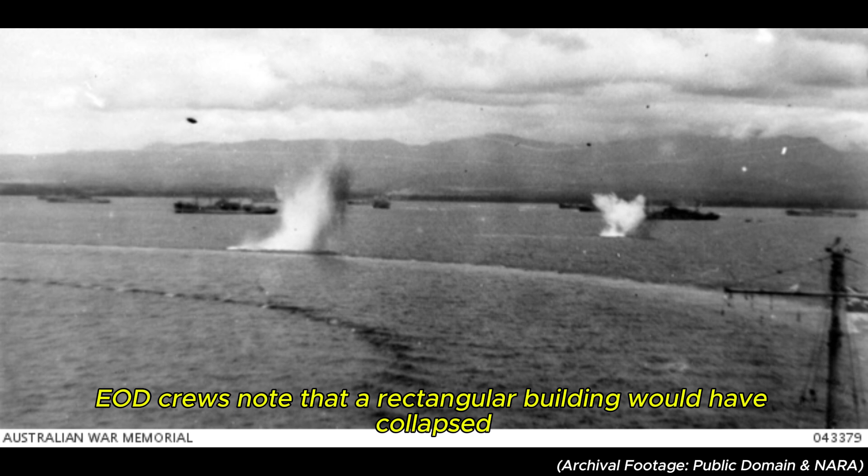Instead, the arch shape, that compression ring the engineers designed in Chapter 3, channels the blast force outward. It blows the walls and roof panels off, but the structural frame, though twisted, is left standing. EOD crews note that a rectangular building would have collapsed completely, burying everyone. The arch's inherent strength means even catastrophic damage doesn't trigger total structural failure.

But the ultimate stress test comes in December 1944. Super Typhoon Cobra hits the Philippines. Winds are measured at 140 miles per hour. At Tacloban, the storm destroys 80% of all structures on the base. Wooden buildings explode into splinters, concrete block structures collapse. But of the 43 Quonset huts on that base, 39 survive intact. The 4 that fail, engineers find they were improperly anchored. The design itself was proven.

By war's end, field performance data from 50 combat zones has fed back into the design. The 1945 production model is a battle-hardened, perfected piece of engineering, worlds apart from the 1942 prototype. May 8, 1945. Victory in Europe. August 15, 1945. Victory over Japan. The world celebrates. And suddenly, the United States military owns roughly 170,000 Quonset huts scattered across 6 continents and has absolutely no idea what to do with them.

May 1945. August 1945. Victory. The world, shattered and exhausted, begins to rebuild. And the United States military, the greatest industrial power on Earth, now owns roughly 170,000 Quonset huts scattered across 6 continents. The original plan assumed these were temporary wartime expedients, disposable tools that would be scrapped or abandoned once permanent facilities could be built. But something unexpected happens. Nobody wants to get rid of them.

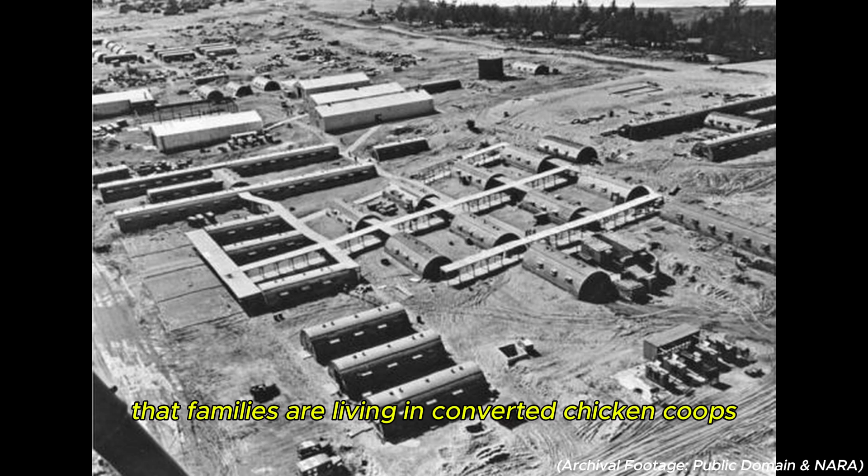At the same time, a new crisis is brewing at home. Veterans return by the millions, victorious, ready to start their lives. And they discover a housing shortage so severe that families are living in converted chicken coops, sharing apartments with 3 other families. The construction industry, starved of materials and labor during 4 years of total war, simply cannot build fast enough. The War Assets Administration, tasked with liquidating surplus military property, finds itself facing an unusual problem. There is more demand for used Quonset huts than they have inventory to sell.

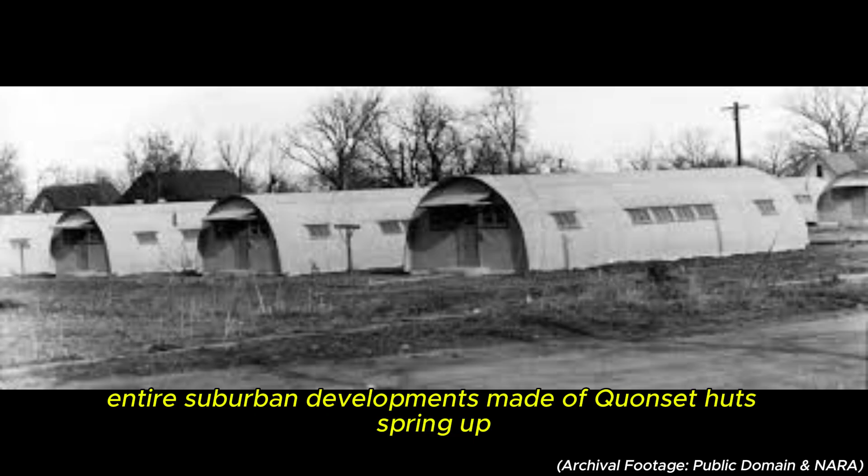Into this domestic crisis, the Quonset hut steps in, ready to fight a new kind of war. It's offered to veterans at liquidation prices, $1,000 to $2,500 for a complete structure that would cost $8,000 to build conventionally. If you could even find someone to build it. And so the Great Migration begins. By late 1946, entire suburban developments made of Quonset huts spring up. Roger Young Village in Los Angeles houses 750 families. Vetvilles appear near universities, flooded by students on the GI Bill who need immediate housing.

And a fascinating architectural adaptation starts. Families add wooden facades to the curved ends, making the structures look less like military surplus and more like quirky cottages. Interior walls divide the open space. Windows are cut into the steel sides, violating every structural principle, but making the spaces truly livable. The military shelter becomes a home.

But housing is just the beginning. The baby boom is hitting. Suburban populations are exploding, and they need more than homes. They need communities. Churches discover the Quonset hut solves a different, impossible equation, providing worship space without the decade-long capital campaigns.

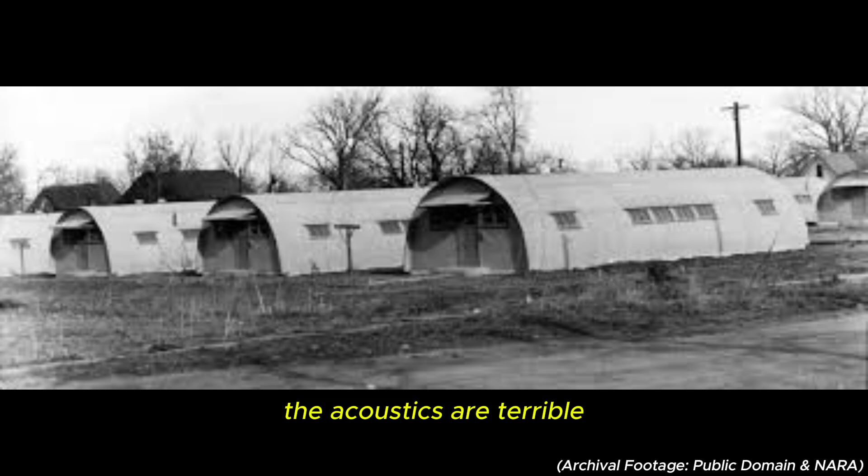First Presbyterian Church of Levittown, Pennsylvania, holds services in a Quonset hut for 15 years. Dozens of congregations make the same calculation. $2,500 for immediate space beats $150,000 for eventual grandeur. The acoustics are terrible. The aesthetics, underwhelming. But people can gather for worship next month instead of next decade.

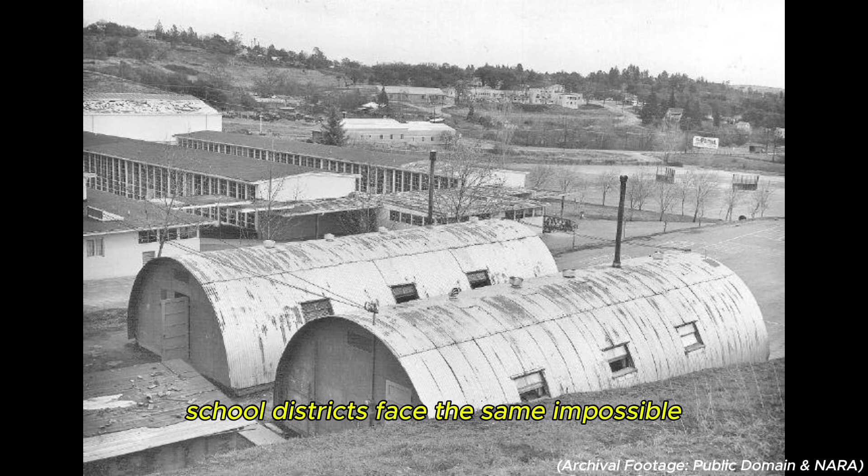Education sees the same adoption. School districts face the same impossible math that plagued the military in 1942. They need classrooms now. By 1950, an estimated 3,000 schools across America include at least one Quonset classroom. Students spend their entire elementary education in these steel tunnels, learning multiplication tables under the same curved ceilings that once sheltered bomber crews in the Pacific.

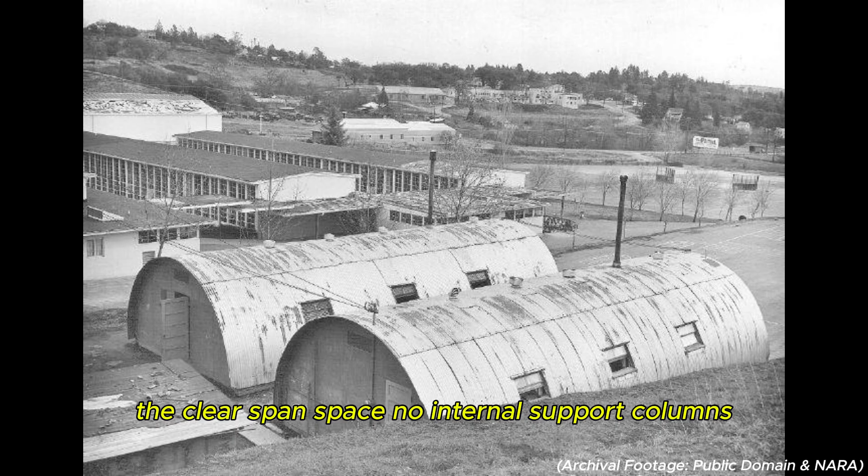The commercial sector joins the party. Machine shops, auto garages, warehouses. The clear span space, no internal support columns, makes it perfect for industrial work. The Quonset hut becomes embedded in the American visual landscape. It becomes a symbol of practicality over pretense, function over form, the ingenuity of making do.

Architectural historians initially dismissed them as temporary eyesores, but to understand why the Quonset hut is truly a brilliant design, you must look at modern disaster zones. When the 2010 Haiti earthquake destroys Port-au-Prince, relief organizations face the exact same equation American military planners confronted in 1942. Immediate shelter for hundreds of thousands, no infrastructure, no time for conventional construction. And the solution that emerges is the Quonset hut's great-grandchild.

The United Nations High Commissioner for Refugees now uses systems called RHUs, refugee housing units. They are essentially Quonset huts with 80 years of material science improvements. Instead of corrugated steel, insulated composite panels; instead of bolts, snap-fit connections. But the core concept is identical: curved profile for wind resistance, self-supporting arch, flat-pack shipping. A two-person crew can erect a modern RHU in 4 hours, almost exactly matching the 1942 specification.

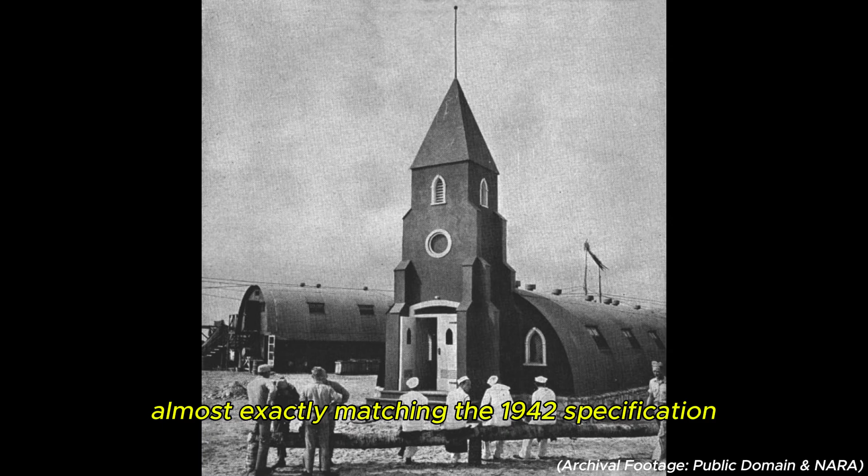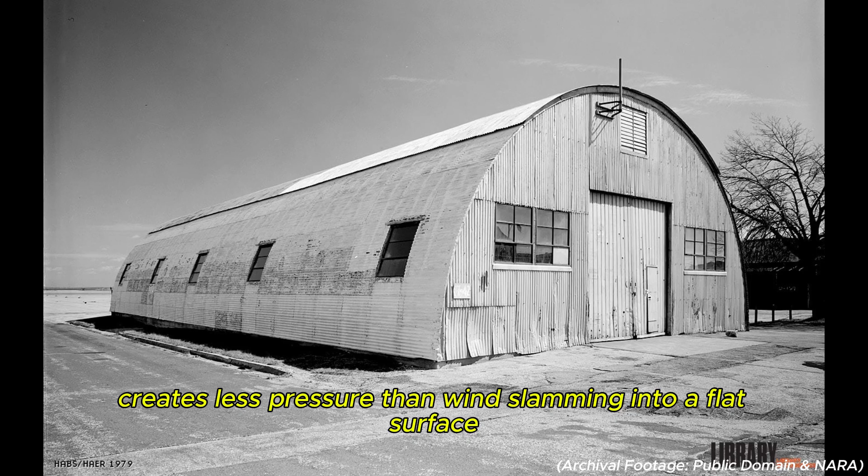The physics haven't changed. After Hurricane Katrina devastated the Gulf Coast in 2005, engineers studying which buildings survived found, unsurprisingly, that curved structures consistently outperformed rectangular ones. Entire neighborhoods of conventional homes were reduced to foundation slabs, while a handful of Quonset-style metal buildings stood intact. This triggered a wave of research into what engineers now call aerodynamic architecture, designing buildings to work with wind rather than resist it. The result looks remarkably like a Quonset hut, because wind flowing over a curve today creates less pressure than wind slamming into a flat surface, exactly as it did in 1942.

The military applications never stopped. The U.S. Armed Forces still deploy arch-style shelters, but now they are made of aluminum alloys reinforced with Kevlar. They deploy from shipping containers, unfolding like origami, and can survive IED blast waves. If you showed a 2025 deployable shelter to the 1942 Quonset Point team, they would immediately recognize their own design philosophy.

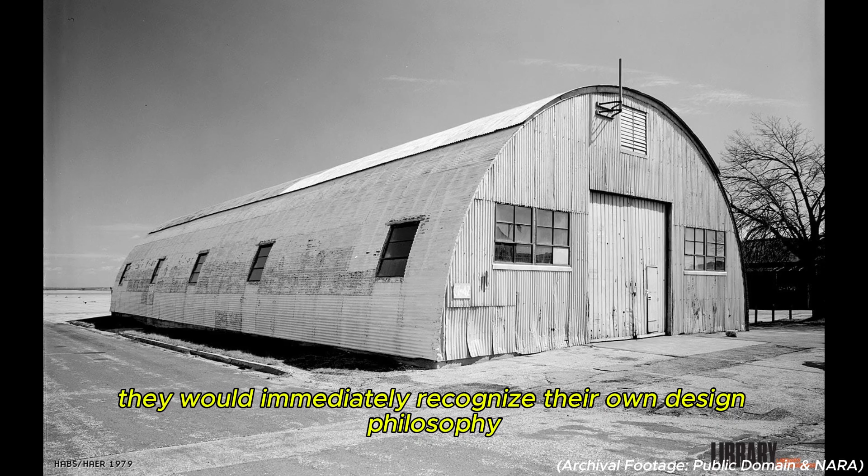The economic argument also remains unchanged. A modern engineered arch shelter costs about $50 per square foot. Conventional construction in that same remote location, $150 to $300 per square foot. The math that drove the Quonset development, how do you shelter the most people for the least money in the shortest time, hasn't changed. But perhaps the ultimate validation, the final proof of the Quonset hut's genius, comes not from our past, but from our future.

On Mars. When NASA and private space companies design habitats for a Martian colony, what constraints do they face? An extreme hostile environment, no infrastructure, minimal tools, unskilled assembly by astronauts who are not carpenters, and the need for maximum strength from minimum materials that must be shipped not 10,000 miles, but 100 million miles. The constraints of interplanetary construction mirror the Pacific Theater of 1942 so precisely that engineers, 80 years later, independently rediscover the exact same solution. Proposed Martian shelters are not rectangles. They are prefabricated, self-supporting arches.

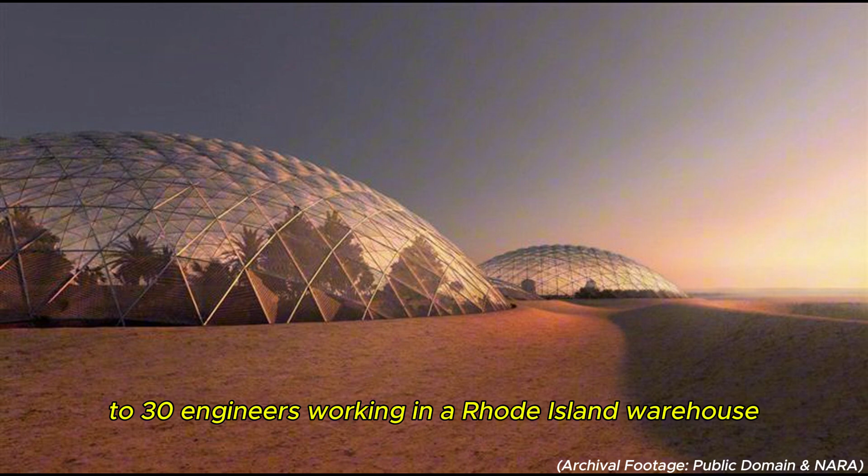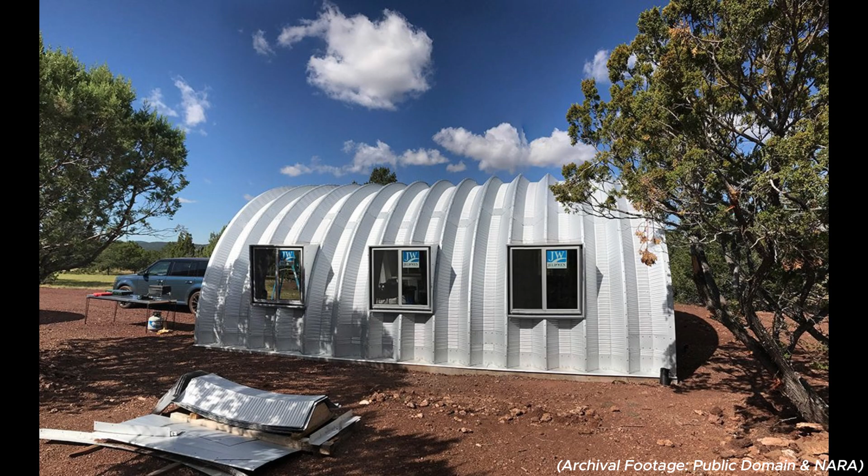When humans finally build permanent shelters on another planet, there is a reasonable chance those structures will owe their design heritage to 30 engineers working in a Rhode Island warehouse during the darkest days of World War II, solving an impossible problem with corrugated steel and brilliant simplicity. This story is more than just military engineering. It's a timeless testament to the power of innovation under pressure. It proves that the most severe constraints, no time, no materials, impossible requirements, and lives on the line, are not barriers. They are the most powerful catalysts for genius.

Faced with an impossible equation, the engineers at Quonset Point didn't try to perfect the old. They redefined the problem entirely. The most inspiring lesson is that remove-the-floor moment, a brilliant stroke of pure pragmatism. They willingly sacrificed perfection for speed, proving that good enough fast enough is infinitely more valuable than perfect but too late. Their legacy isn't just 170,000 steel structures. It's a timeless philosophy. Simplicity is resilience. Adaptation is more important than the initial plan. And when faced with a problem that seems impossible, human ingenuity, fueled by absolute necessity, will always find a way.